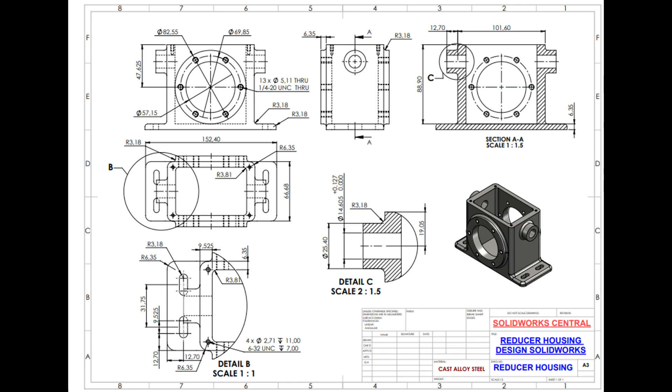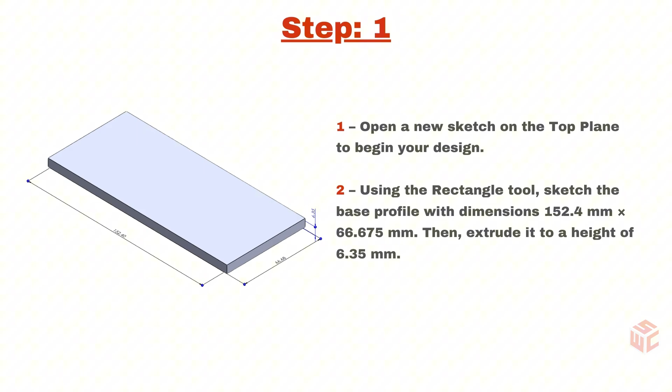Step 1. Open a new sketch on the top plane to begin your design. Using the rectangle tool, sketch the base profile with dimensions 152.4 millimeters by 66.675 millimeters. Then extrude it to a height of 6.35 millimeters.

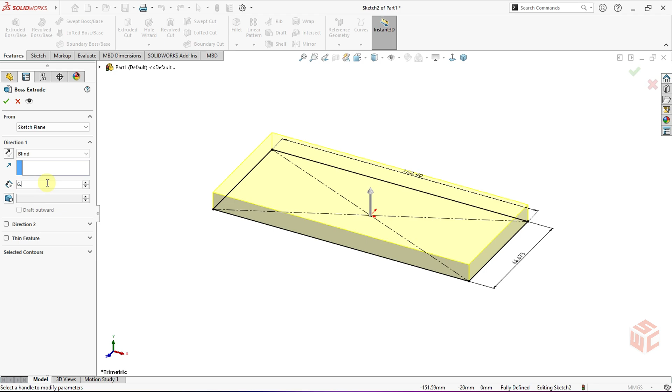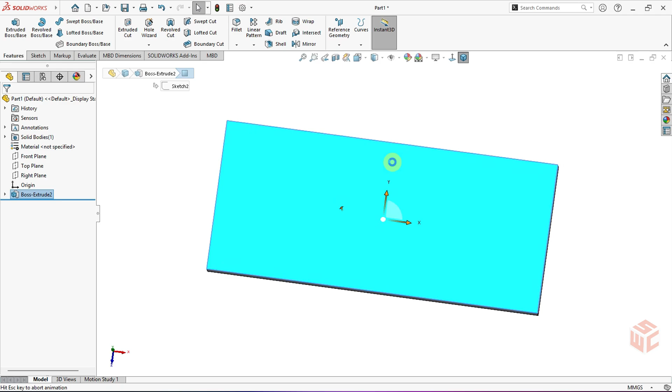Step 2. Open a new sketch on the top face of the solid body and draw a rectangle with dimensions 101.60 millimeters by 66.675 millimeters. Then, use the Extruded Boss base command to create a solid with a height of 88.9 millimeters.

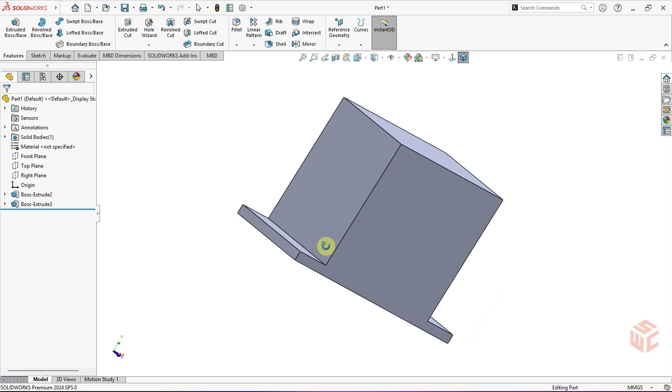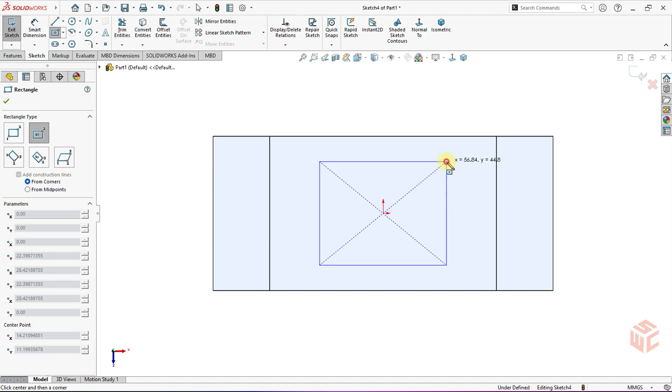Step 3. Open a new sketch on the top face of the solid model we created. Using the rectangle tool, draw a rectangle with dimensions 82.55 millimeters by 53.975 millimeters. Use the Extruded Cut command to cut through 88.9 millimeters.

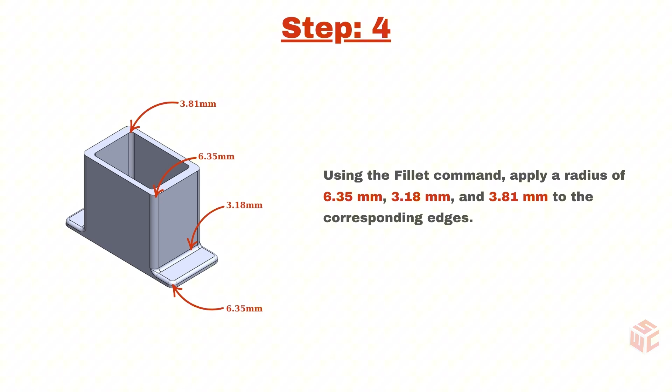Step 4. Using the Fillet command, apply a radius of 6.35 millimeters, 3.18 millimeters, and 3.81 millimeters to the corresponding edges.

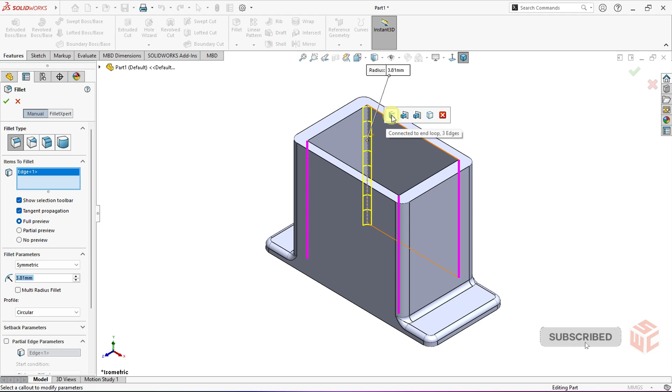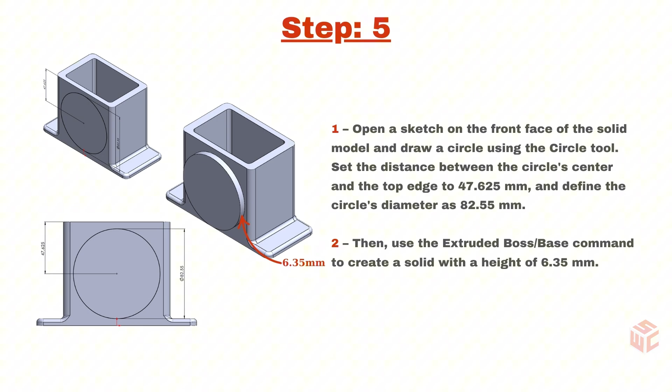Step 5. Open a sketch on the front face of the solid model and draw a circle using the Circle tool. Set the distance between the circle's center and the top edge to 47.625 millimeters, and define the circle's diameter as 82.55 millimeters.

Then, use the Extruded Boss base command to create a solid with a height of 6.35 millimeters.

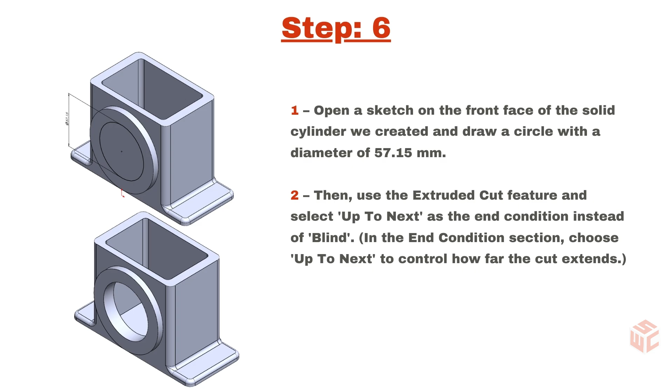Step 6. Open a sketch on the front face of the solid cylinder we created and draw a circle with a diameter of 57.15 millimeters.

Then, use the Extruded Cut feature and select Up to Next as the end condition instead of Blind. In the End Condition section, choose Up to Next to control how far the cut extends.

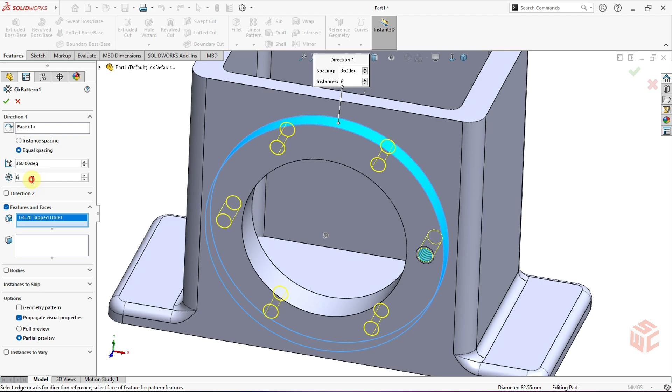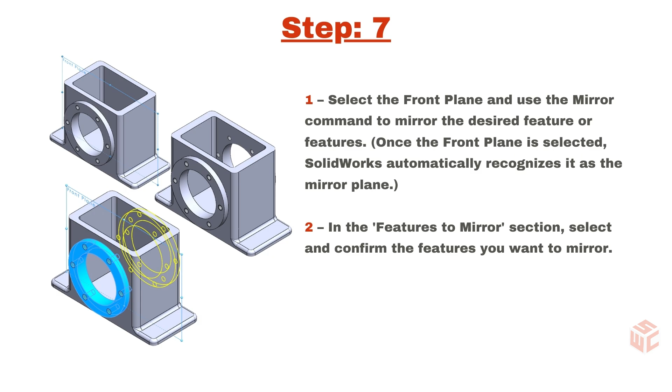Step 7. Select the front plane and use the mirror command to mirror the desired feature or features. Once the front plane is selected, SolidWorks automatically recognizes it as the mirror plane. In the Features to Mirror section, select and confirm the features you want to mirror.

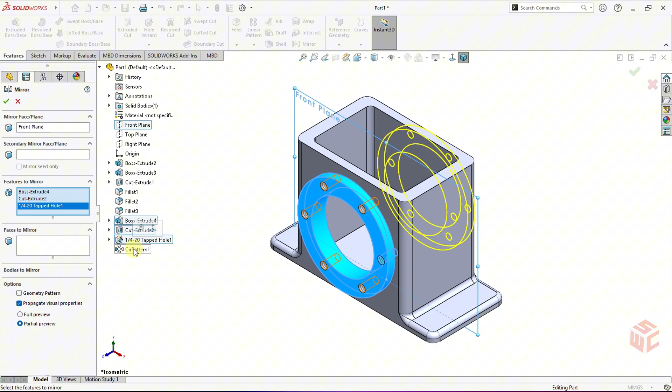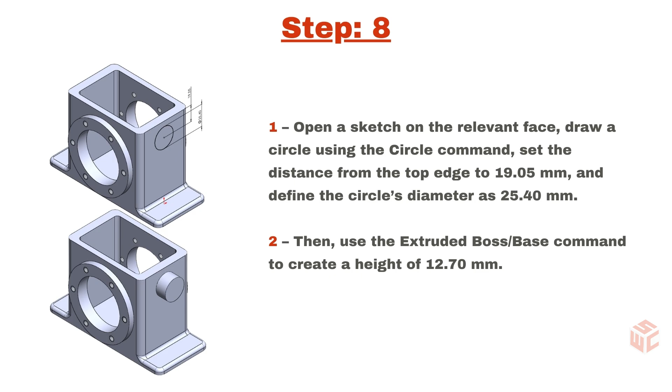Step 8. Open a sketch on the relevant face, draw a circle using the Circle command, set the distance from the top edge to 19.05 millimeters, and define the circle's diameter as 25.40 millimeters. Then, use the Extruded Boss base command to create a height of 12.70 millimeters.

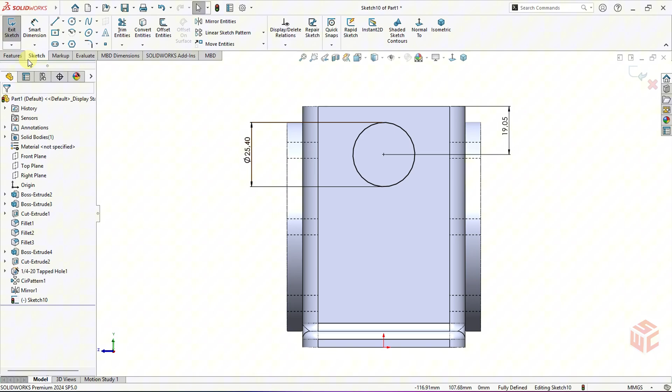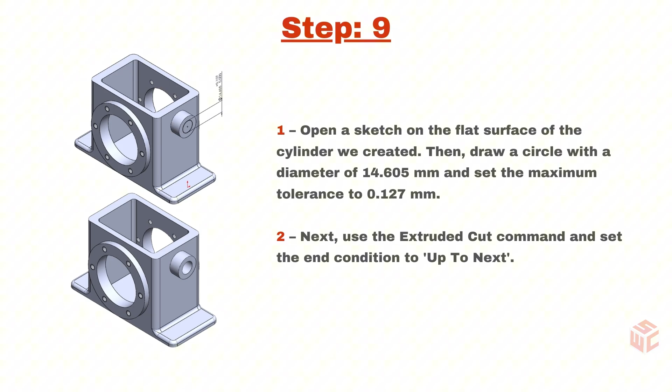Step 9. Open a sketch on the flat surface of the cylinder we created. Then draw a circle with a diameter of 14.605 millimeters and set the maximum tolerance to 0.127 millimeters. Next, use the Extruded Cut command and set the end condition to up to next.

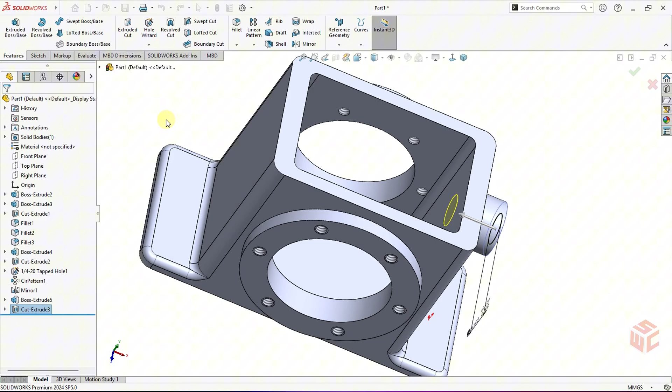Step 10. Next, perform the mirror operation as in Step 7, but this time using the right plane.

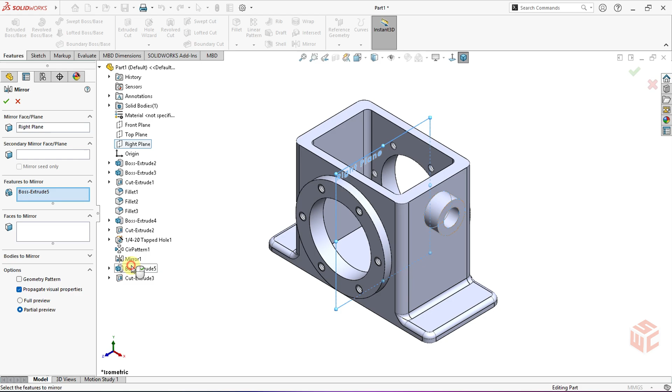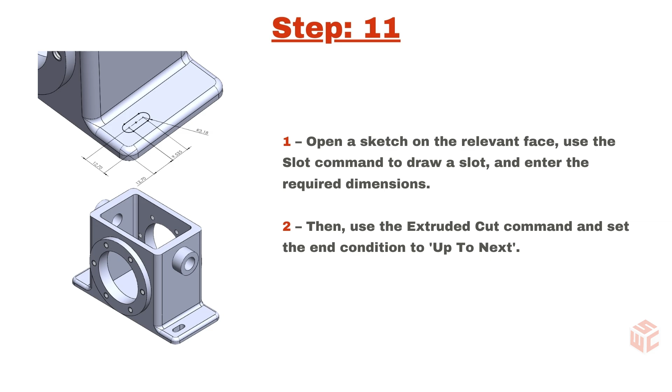Step 11. Open a sketch on the relevant face, use the Slot command to draw a slot, and enter the required dimensions. Then, use the Extruded Cut command and set the end condition to up to next.

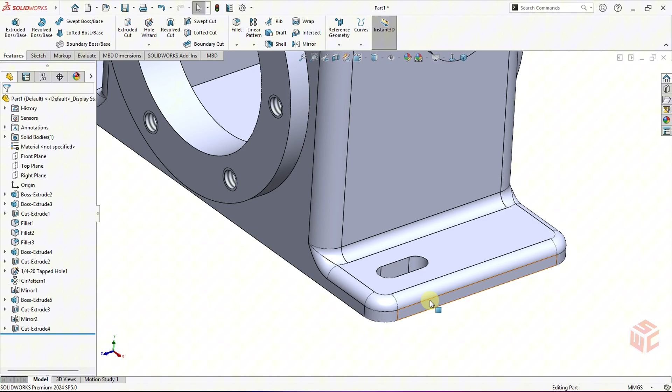Step 13. Up next, the Hole Wizard feature. Stay tuned. Step 14. Using the Fillet command, assign a radius of 3.18 millimeters to the edges of the cylinders. Step 15. Finally, apply the material. Cast alloy steel.